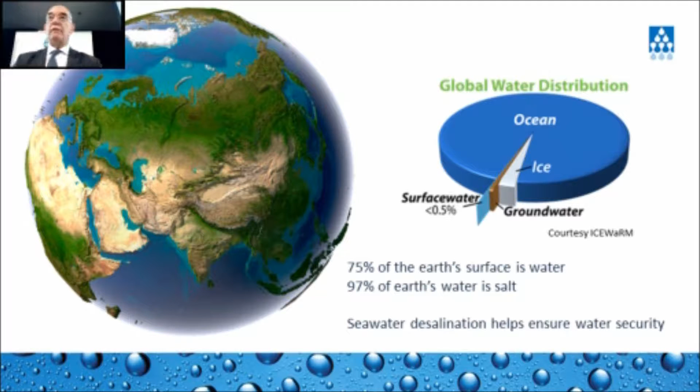So what I want to start to talk about is some solutions as we look towards 2050. One of the obvious things when you look at the Earth from space is that it's mostly covered with water. So the concept of us running out of water or being short of water is not correct. But as you can see from this diagram, which I've got courtesy of ICEWaRM, most of it is salt water in ocean. So a possibility of desalinating the salt water gives us one solution.

If you look at the history of desalination, this is a projection that was done some years ago, but it's nonetheless typical of what is happening with the world's desalination market forecast. These figures are from Global Water Intelligence. So it is a technology that is here to stay. It is an alternative. It is more expensive naturally than traditional supplies, but is being adopted widely around the world, and they think there are something like 17,000 desalination plants that are currently active, traditionally in the Middle East, now far more widespread.

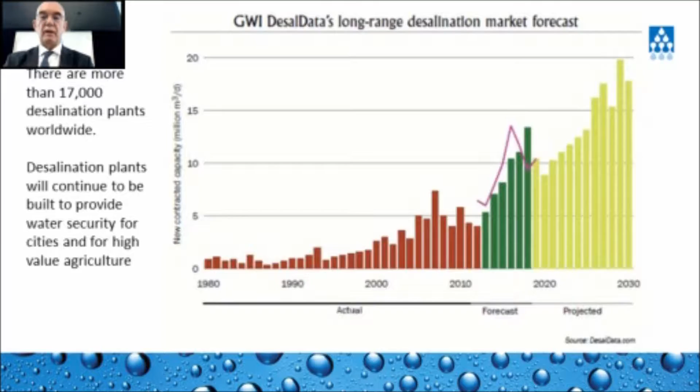In Australia, as a result of the Millennium Drought, we had a program of building desalination plants and water recycling facilities, which I'll show here progressively, for all the mainland state capital cities. I have not shown the Brisbane water recycling facility in this because this was a desalination presentation, but that was a significant piece of infrastructure that's now largely been mothballed because as soon as they built it, it rained.

Now, Matt mentioned a deficit of some 800 gigalitres looking forwards to, say, 2050 with the size of the increase of the capital cities, which are adjacent to the sea. Hence, a supply of water is available for it. And if we add up the total capacity of this plus the recycling system in Brisbane, it comes to something like 700 gigalitres. So if you look, and Michael Porter later will talk looking forward 100 years, the contribution of these plants adds immeasurably to Australia's water resilience and to security of the capital cities. It's astonishing what's been achieved.

There were 6 world-class desalination plants at a total cost of some $12 billion permitted and approved in a space of 8 years. By contrast, America has just last year commissioned the Carlsbad desalination plant in California. It took 16 years to build and to permit. Now, the message in this is that the construction of the desalination and water recycling facilities in Australia was a remarkable achievement in investment in public infrastructure that has been paid for by the utilities and the consumers in the form of increased rates.

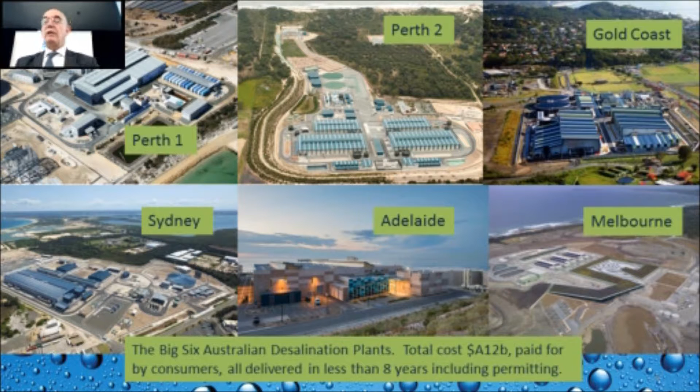To give you an alternative, in Perth, which is currently being constructed, this is the pilot plant for the advanced water treatment facility at Beenyup wastewater treatment plant. This will take treated sewage, turn it into basically drinking water quality through a reverse osmosis and advanced oxidation process, then inject it into the aquifer, which will be picked up in some years' time through the water treatment plants at Beenyup and Mirrabooka.

This plant will be ultimately built to be 28 gigalitres. The current construction is 14 gigalitres. By contrast, in Perth, the desalination capacity is 145 gigalitres. So this is only a tenth, but it's an important aspect of the diversity of supply that Perth has had to face because of the declining water supply that Matt mentioned.

Last year, incidentally, it was the worst on record since they've been kept from 1911. The total reservoirs in Perth received 11 gigalitres over the year, 15 gigalitres evaporated, so the net take was minus 4 gigalitres. And you're saying it's going to even get worse in the future. The reservoirs that have water in them are because it's been pumped in from the desalination plants and the groundwater system.

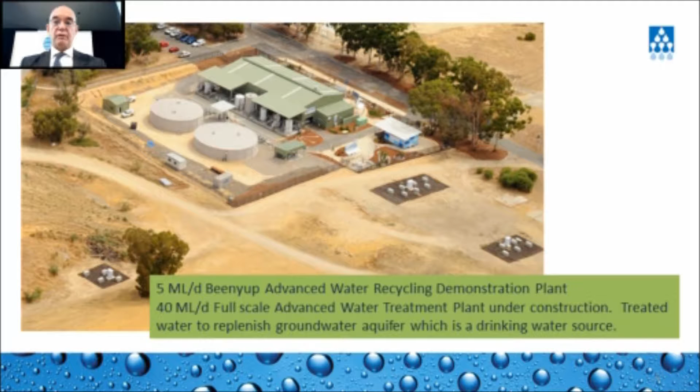If we look at the impact of the desalination plants, this shows for Sydney, Melbourne, Brisbane and Perth, including the water recycling facility in Brisbane, that the climate resilient water capacity in each of these cities is pretty significant. So overall it's about 30%, but in places like Adelaide, Perth and Brisbane, the capacity of the desalination is about 50% of the water supply.

Now the reason these were built was because of political and natural crises, and it's just been my observation in life that things get done when you have a crisis. They probably should have been done a long time ago, but it's a big investment and nobody wants to do it, and particularly water supply seems only to be negative in terms of political. In the 50s and 60s, it was popular to build dams and people got votes from building dams, but nowadays it's the opposite. They want to get water, but nobody wants to pay for it.

So the crisis instituted this widespread project, and it's a very, very large infrastructure project in Australia, one which I speak about at many international forums, and one of which I'm actually proud of because it was achieved in such a short time. And the other thing is that the environmental aspects of intake and outfall and impact on the marine environment have been taken care of, and they're all offset with wind energy, which makes them a bit more expensive.

So how expensive? Perth's first plant at Kwinana costs around about $1.20 Australian per kilolitre. It's the best performing plant. It's supplied with green energy from Emu Downs, north in Western Australia, and if you translate it to US dollars, it is about 90 cents. The best in the world is at Sorek in Israel, that's 57 cents. So we're not too bad.

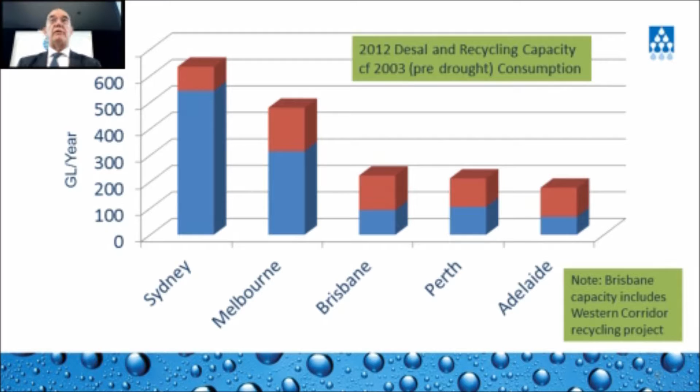The others are more expensive for reasons that, you know, if you want to buy an airfare to London in 6 months' time, it might cost you $1,500. If you want to buy it tomorrow, it costs you $3,000. That's why we have expensive desalination facilities in Australia, with the exception of Perth, where there was a lot of planning involved in it.

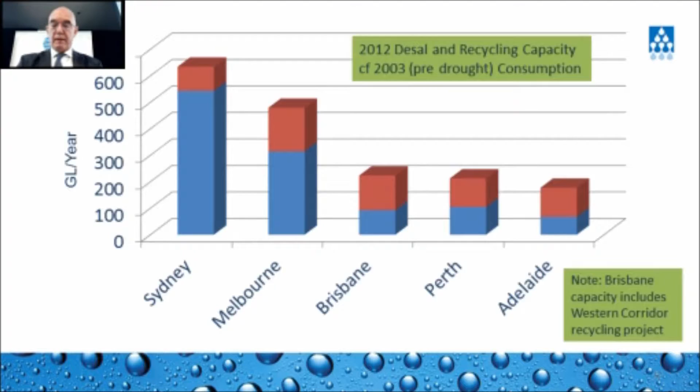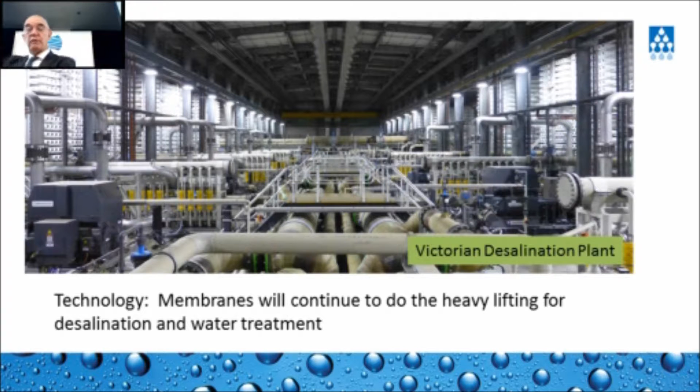So we investigated solar-powered membrane distillation, both state-of-the-art processes, and got it to work. But the membrane distillation process suffered from the divalent ions, which were common in the water supply, and so it worked, but we had to stay there and watch it and acid clean it to keep it going. They are currently on tender for a reverse osmosis plant, which we recommended would also do the job at low recovery. And of course, once that happens, the community becomes secure completely for its water supply.

The only downside is that they're going to power it from the diesel power station, but the cost to run the desal is very small compared to running the air conditioners in the homes. But that is a long-term solution, and if we can look more at the solar-powered desalination opportunities, because Australia's got plenty of sunshine, plenty of land, plenty of bad quality water, then I think we'll be onto something.

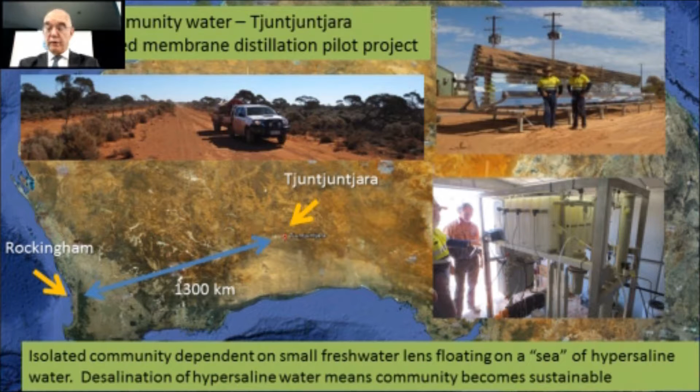Most of you will be familiar with the Sundrop Farms establishment at Port Augusta. So we're now growing greenhouse tomatoes at Port Augusta, but it's a solar tower, the only one in the Southern Hemisphere, that provides the heat and energy and also powers a desalination plant, because the water comes from Upper Spencer Gulf and is desalinated into basically distilled water. They add the cocktails to it, which is ideal for the tomatoes, and it's hydroponically grown.

20 hectares, an enormously productive greenhouse, and they've gone on to sign contracts with Coles, so they'll be supplying tomatoes to East Coast Australia for the next 12 years. It's a bold, disruptive way of thinking. Who would have thought you could grow tomatoes in Port Augusta?

Incidentally, the power station, and I'll come back to that later. The power station has 400 jobs, 200 jobs have been created in the greenhouse. So that's an opportunity going forward.

Looking at even more smaller scale things, there's an opportunity in rural areas, and we were dealing with a farmer on the west coast that had 5,000 milligrams per litre for stock watering, which is getting up towards the upper limit. If you give stock fresher water, they grow faster and they're happier. And so we did some work, we haven't built it yet, on a solar-powered, low recovery desalination system, reverse osmosis.

And the principle of this is to take water out of the aquifer, extract about 10% of the fresh water out of it, and then put the concentrate back down into the aquifer, and that produces permeate. And this particular one, I think the cost turned out to be about $16,000, for which they get 1 cubic metre per day, more in summer, less in winter.

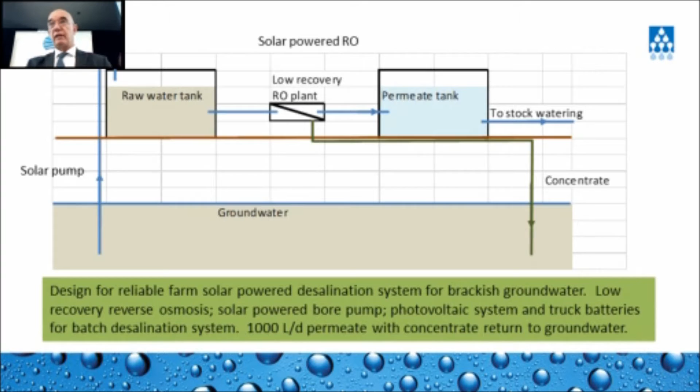The cost of photovoltaics are coming down all the time as well, and we have a lot of interest from around the country. So traditional reverse osmosis systems for country areas have been pretty expensive, and what they've done is the purveyors will sell you a desalination plant, and usually a service contract, and it rapidly becomes unaffordable or it stops working. Just quickly, a few projects that are on the go at the moment.

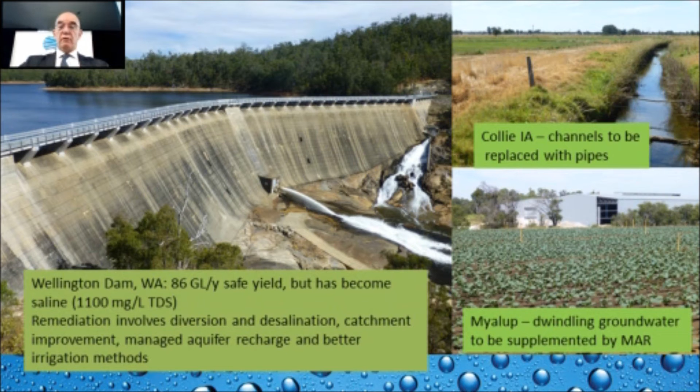Wellington Dam in Western Australia, it's become salinised because of catchment clearing. It's an open channel irrigation system, so there's opportunities to replace it with a pipe system, but it depends on intercepting the upstream saline flows and desalinating them to improve the quality of the water. If that's done, there's a huge economic benefit for the state of Western Australia.

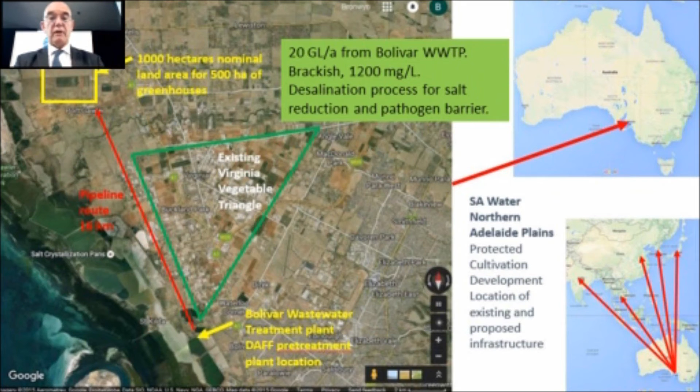Closer to home, we're working on a project on the northern Adelaide plains, which is once again disruptive, bold and imaginative, to take 20 gigalitres of Bolivar water and create a high-tech greenhouse. It's still in the early stages, but if it works, there's a big market to the north of us, which you can see in the bottom right-hand corner, that we ought to be able to capitalise on. And that's the project that's in hand at the moment.

So, Matt, in the future, you've been able to measure, predict, but maybe the next step is to control, and we'll solve a lot more problems then. So, can we learn from nature? Yes, I think we've come a long way, but we want to continue encouraging Australian water technology innovation, and to that end, our centre's involved in a larger project to bid for a future water CRC to continue on water technology and water research into the next 10 years.